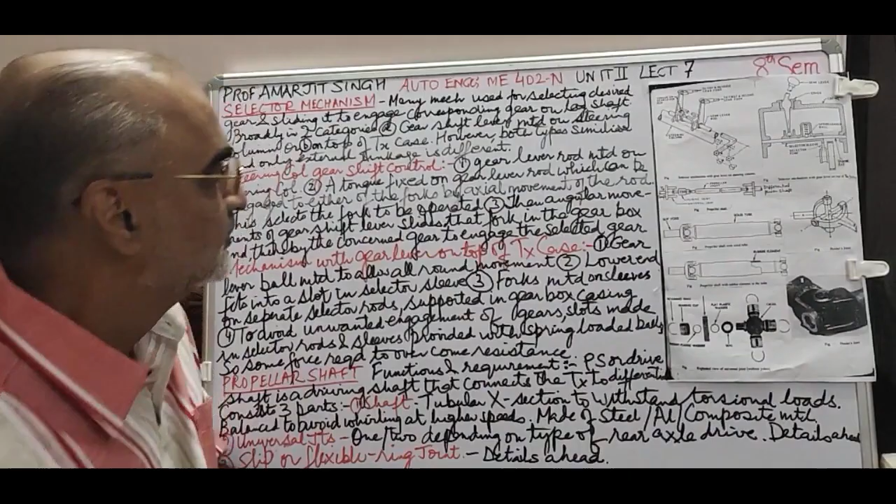Welcome to the second lecture, overall the seventh lecture, second lecture of Unit 2. Having seen the transmission box, that is the gearbox, let us see the various selector mechanisms for selecting the gear which you want for your vehicle.

There are many mechanisms used for selecting the desired gear and sliding it to engage the corresponding gear on the lay shaft. There are broadly two categories. The working is almost the same except for the positioning. The first is the gear shift lever mounted on the steering column, and secondly on top of the transmission case, that is the gearbox. However, both types are similar and only the external linkage is different.

Now let us see the parts. This is the steering column. This is the mechanism fitted. Now there are two levers. This one for the top and reverse gear fork. These are the two forks. And the second fork is for the first and second gear. This is the gear lever rod. Inside there is a tongue on the gear lever, fitted onto the gear lever rod.

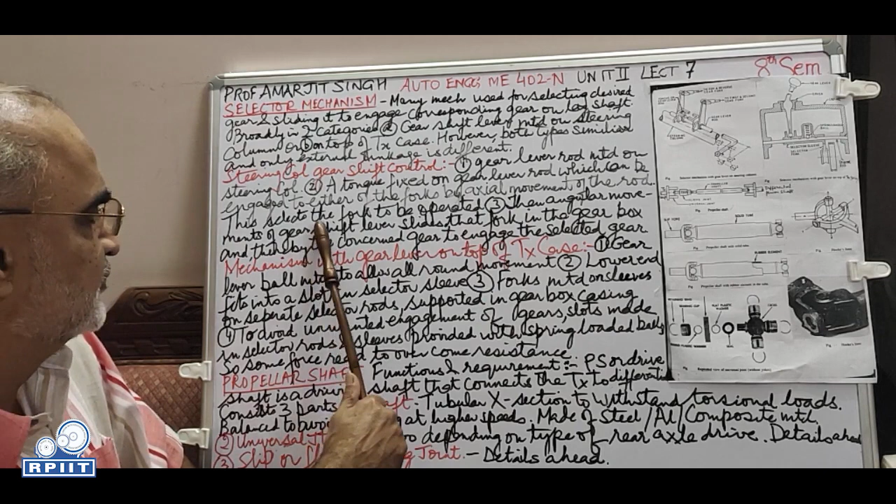The gear lever rod is mounted on the steering column, as I said. A tongue fixed on the gear lever rod can be engaged to either of the forks by axial movement of the rod. This tongue can be shifted to this fork or to this fork with the help of the lever, by the rod. This selects the fork to be operated. If you slide it this side, this fork will be selected. Slide it towards this side, this fork will be selected.

The angular movements of the gear shift lever slide that fork in the gearbox and thereby the concerned gear to engage the selected gear. Now this type, I don't know about your generation, but I have this in my car. It was in the earlier Premier Padmini and Ambassador cars. Near the steering wheel, on this side, there used to be the gear lever on the column.

So if you see these positions, this is neutral, neutral. Neutral to neutral moves the tongue from this side to this side. Now let us see first. For first, move it here and then move it upwards. As a result, this will get connected to the first gear. Again bring it to neutral for the second. Same fork. Bring it to neutral and then press it down. Second gear.

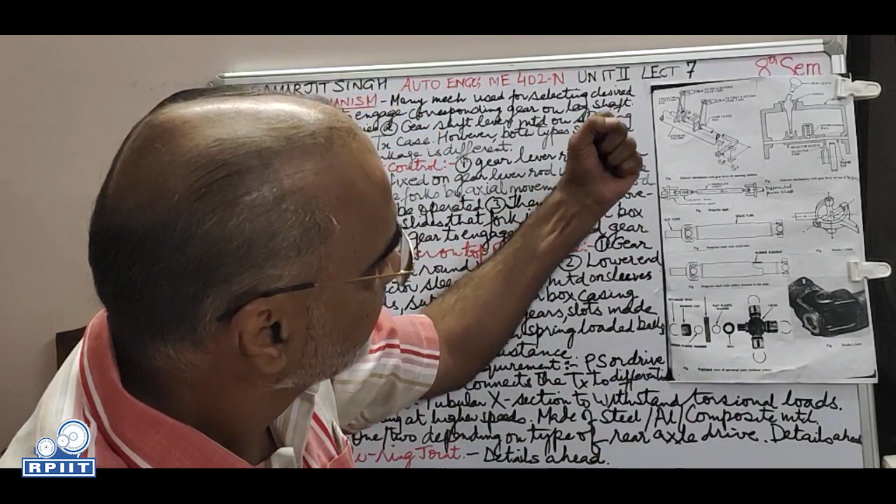For third and reverse, neutral, push it back. The tongue comes here and engages this fork. For the third, upwards, it gets connected to the third gear. And for reverse, back to neutral and downward, it connects to the reverse gear.

The second type is the mechanism with the gear lever on top of the transmission case. Let's read it, then we'll explain. The gear lever is ball mounted to allow all-round movement. Most of you must have driven a car; when you sit in neutral, you can see that there is a slight play. That is deliberately allowed, the all-round movement. This is the knob which you hold to change the gear.

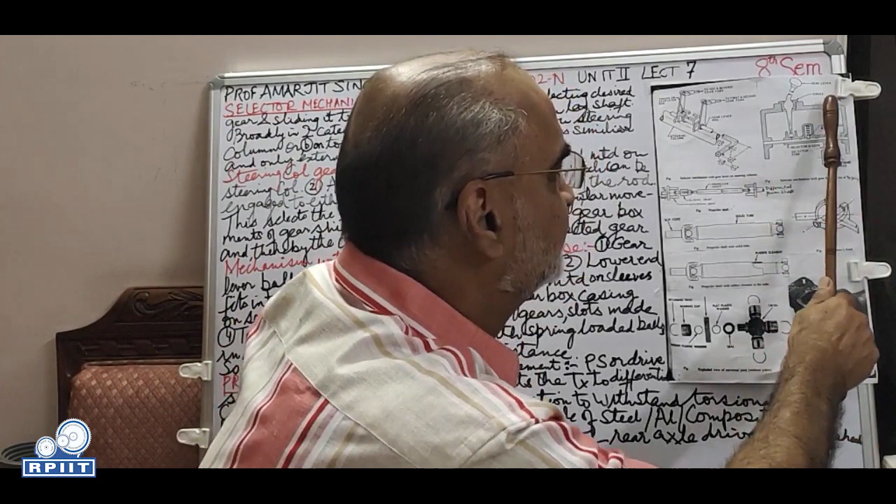This is the casing of the gearbox. This is a cover to prevent dust from coming inside. This is a rod which is mounted inside the casing. There will be a number of them depending upon the number of gears you have. This is the selector sleeve, and this is the selector fork. Selector rod. There are many selector rods inside the gearbox depending upon the number of gears.

So, the lower end fits into a slot in the selector sleeve. There's a slot here, so that it comes to the right position. There is a slot, meaning a slight depression where this ball comes and fits, and it is spring loaded. So to move it, you have to apply slight pressure.

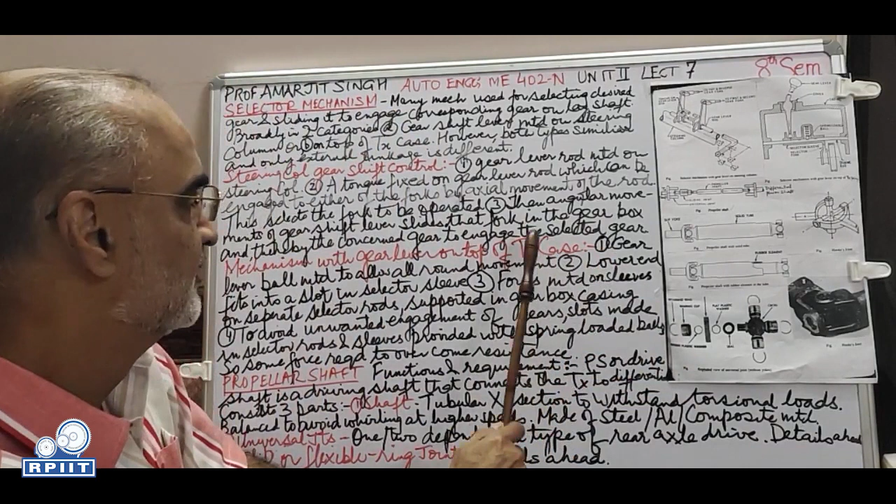Forks mounted on sleeves on separate selector rods supported in the gearbox casing. There must be bearings here. There will be bearings, and there will be a number of selector rods inside the gearbox casing. To avoid unwanted engagement of gear, slots are made in selector rods and sleeves provided with spring-loaded balls. So some force is required to overcome resistance.

So very simple. When you want to, you hold the gear knob, move it left to right, and the selector fork selects the required place and engages the gear.

The propeller shaft. This is the propeller shaft. If you have crossed a car on the GT road or any big road on your motorcycle and seen it from the side, there is a long shaft at an angle which is rotating. That is the propeller shaft, which is giving the drive from the engine to the rear differential.

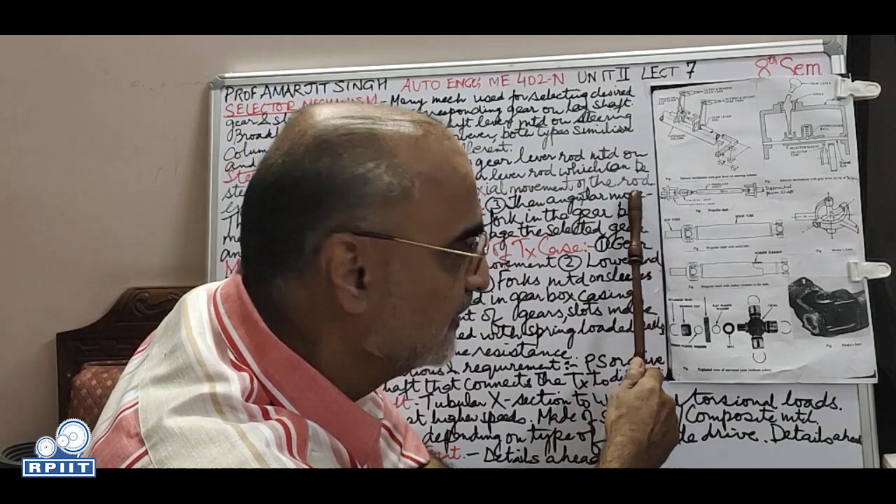This is the transmission shaft coming from the engine, propeller shaft, and then of course the flywheel and gearbox, and after the gearbox, this is the gearbox output shaft, you could say. This is connected to universal joints. I'll explain to you the function of the universal joints. This is a sliding joint, meaning the propeller shaft can move in this; it's splined from inside, for when the distance between the differential and this reduces or increases.

When will that happen? When, let's say, the vehicle goes over a speed breaker, this will rise and the distance will reduce so that this will go in. When it comes to a depression or a gadda, this will go down relatively and this length will increase. This distance will increase.

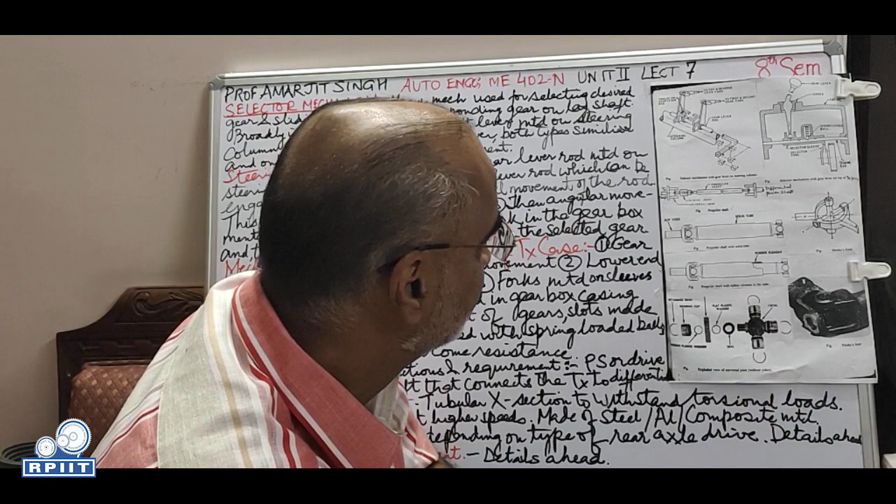The propeller shaft on one end is connected through the universal joint to the output shaft of the gearbox, and the other end again through a universal joint to the differential pinion shaft. This is the entry into the rear differential. It is called the pinion shaft. Inside, the pinion is mounted; it revolves on a big crown wheel, which is the final drive. We will be coming to that later on.

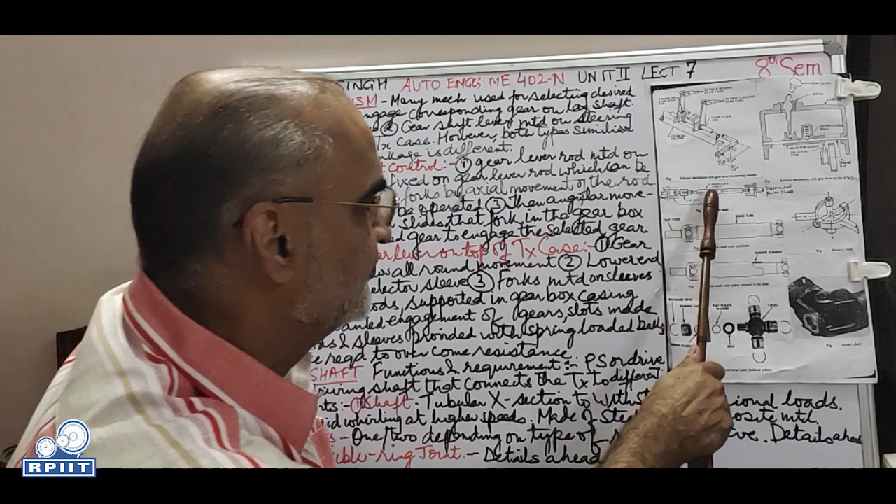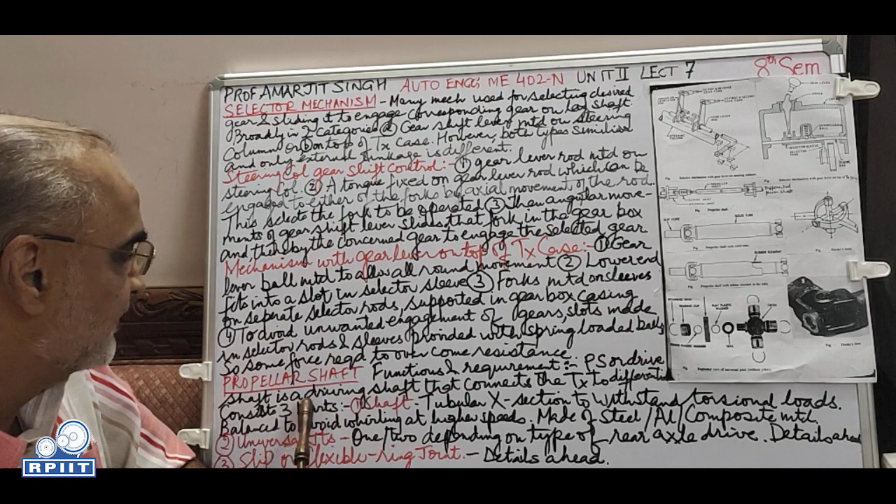What is the function of the final drive? It gives a reduction, and at this stage, it is sufficient to know these 1, 2, 3 shafts, and the propeller shaft is in between. The functions and requirements. The propeller shaft, also called the drive shaft, is a driving shaft that connects the transmission to the differential.

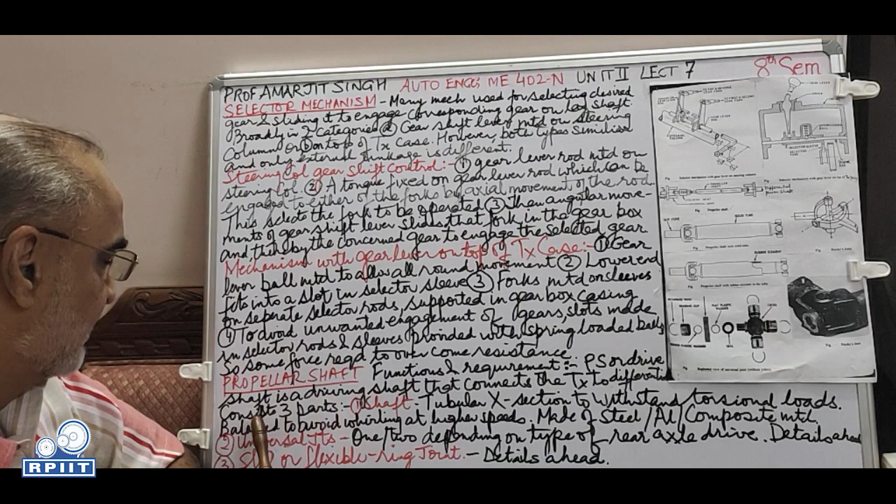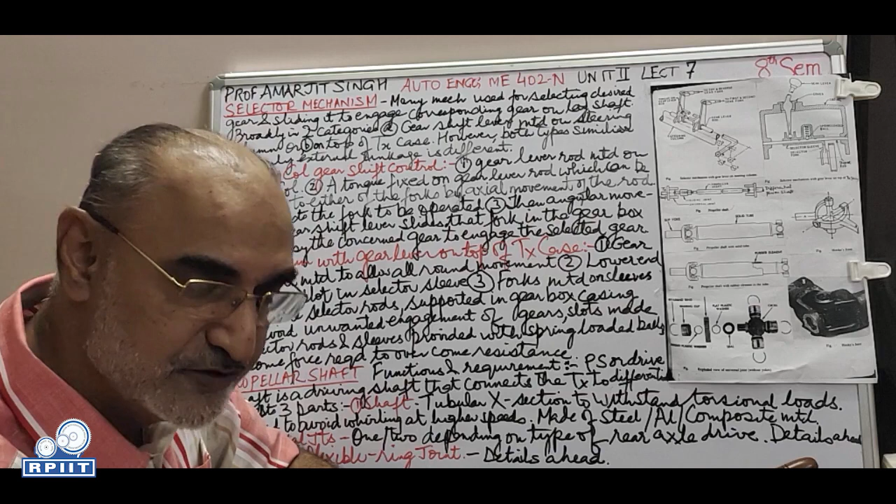It consists of 3 parts. The shaft. This is a bigger view. This is the shaft. Its cross section is generally tubular to withstand torsional loads. We know that tubular shafts can withstand torsion, because it is rotating at high speeds, low speeds, various speeds, and torsional vibrations can set in. So to offset that, we have a tubular type.

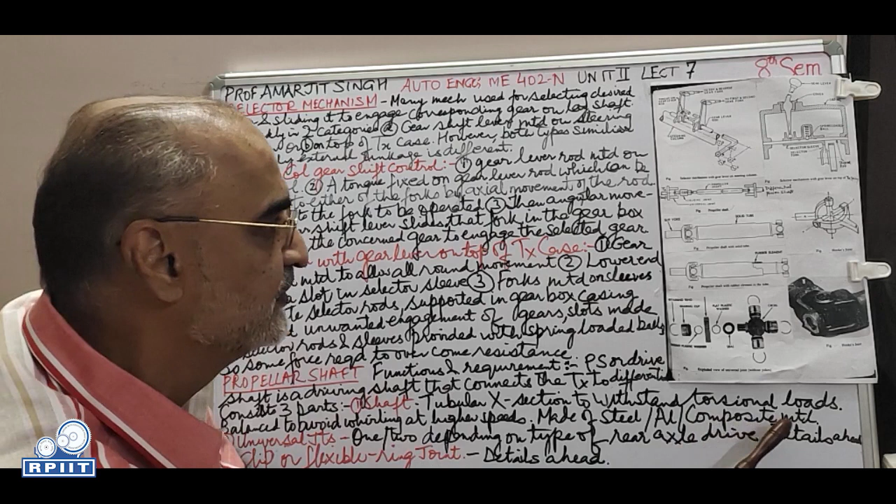It should be balanced to avoid whirling at high speeds. If it's not balanced, it will whirl. Whirl means like this, which will cause vibrations and unnecessary forces which we don't want to develop. It is made of steel, aluminium, or any composite material. Propeller shaft.

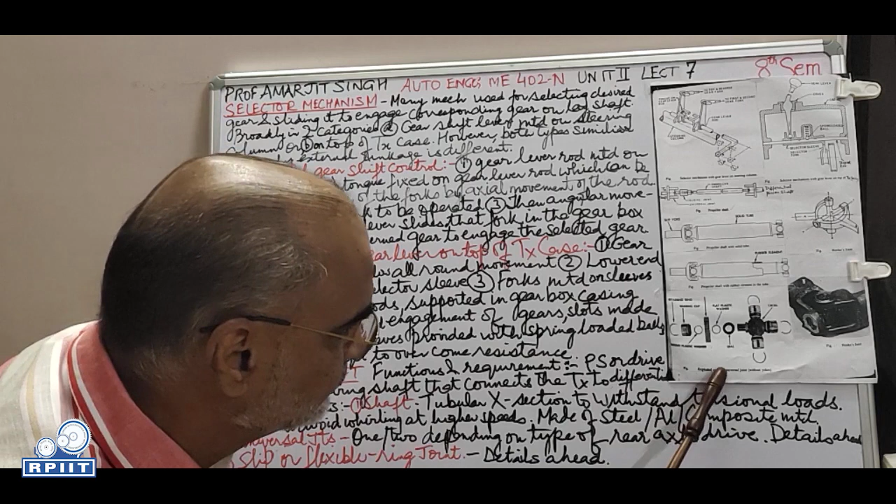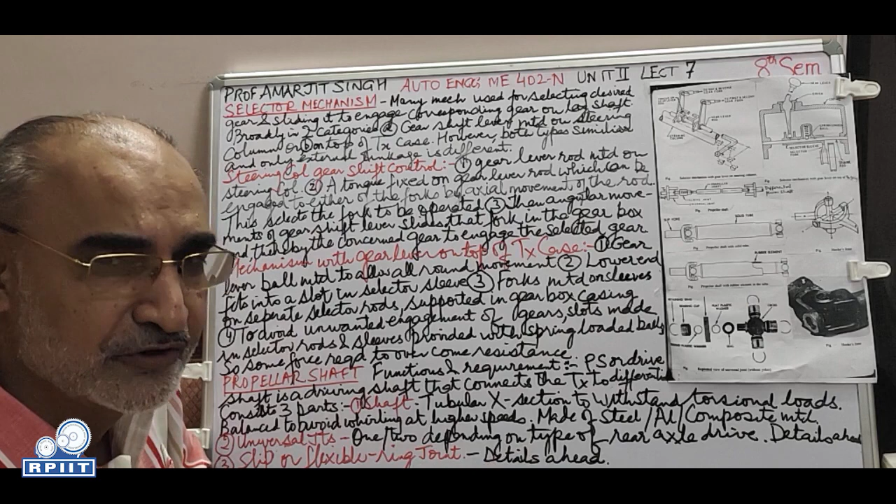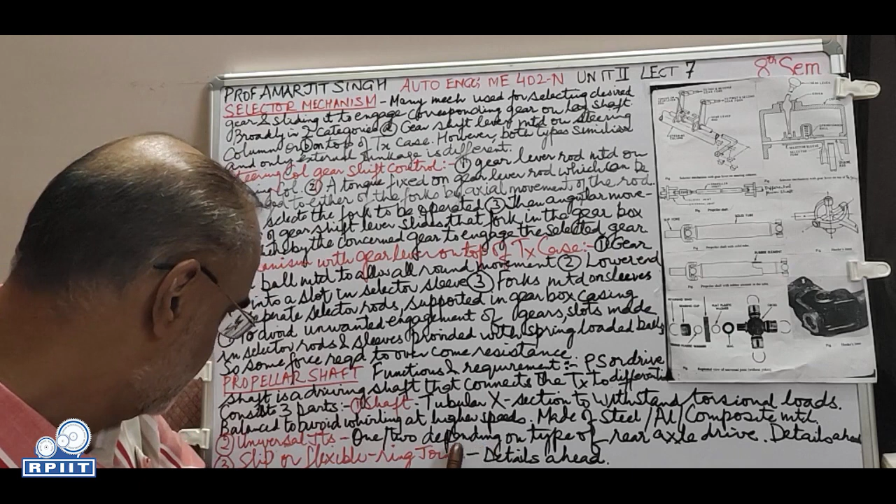Universal joints. This is the cross section of a universal joint. 1 or 2 depending on the type of rear axle drive. In differential drives, there are basically 2 types. One is the Hotchkiss drive and the other is the torque tube drive. We will be studying that ahead. In the Hotchkiss drive, there are 2 universal joints. In the torque tube drive, there is 1 universal joint.

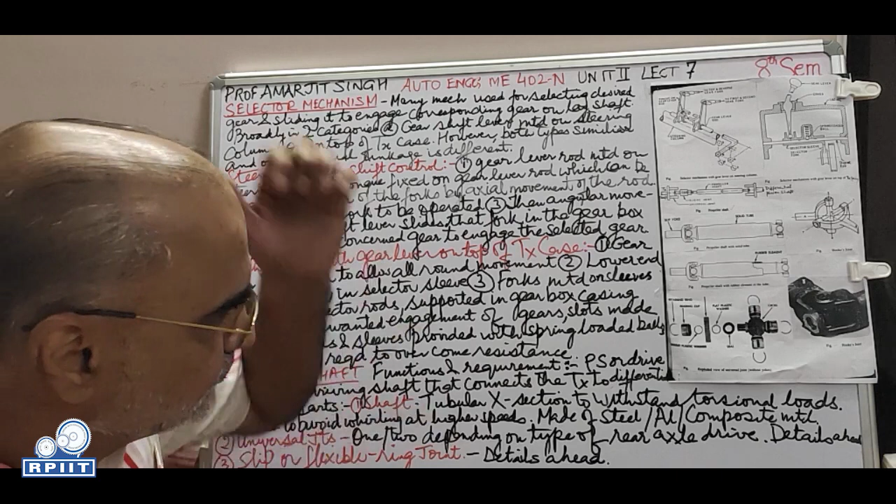So, let us see the construction. This is the cross. Bearing cups, retaining rings. This is also retaining rings. There are bearings here so that it can rotate without noise, and also to increase the life; seal, flat plastic washer. Slip or flexible ring joint. This we'll see ahead. I'll explain more of this on the next page.

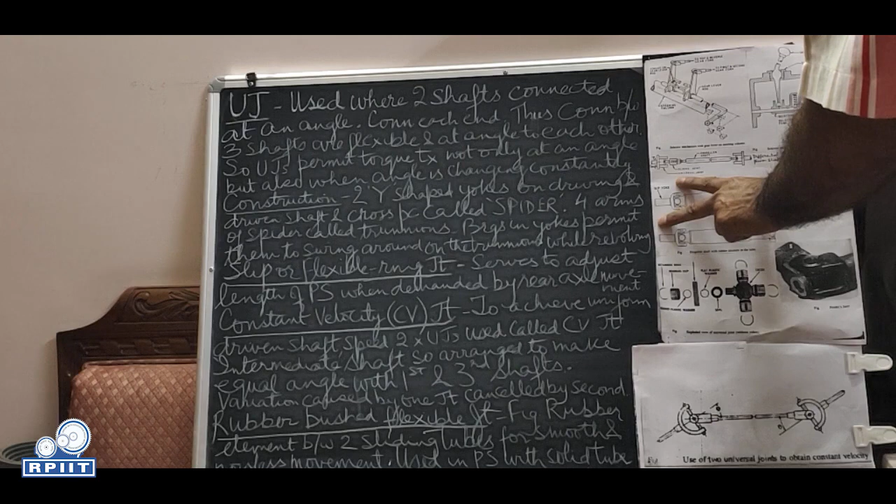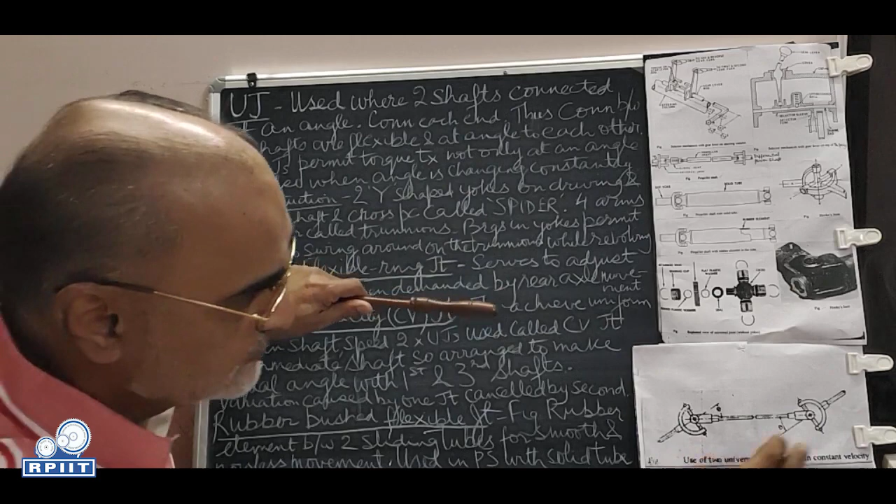So as I said, universal joint, let's read more about it. Universal joint, used where 2 shafts are connected at an angle. This is the output, let's say, shaft of the gearbox. This is the propeller shaft. They have to be connected at an angle. They are connected at an angle because the differential is at a lower level than the gearbox. This is the differential, the rear differential, that big gola which you see behind trucks. So they're at an angle.

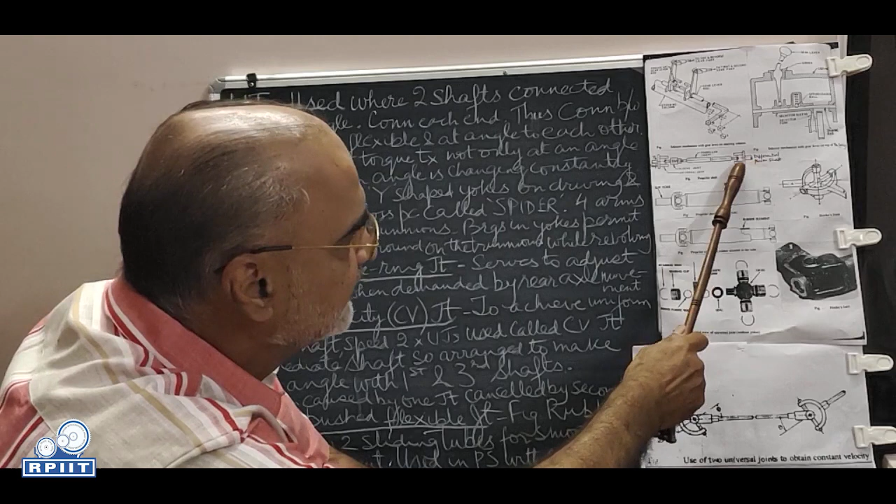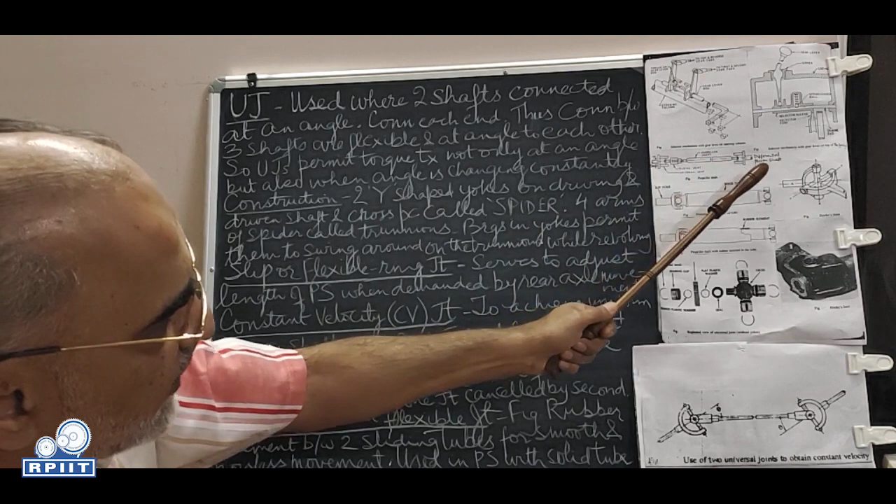Connection at each end I already explained. One side of the propeller universal joint is connected to the transmission shaft and to the propeller shaft, the other one to the propeller shaft and the differential pinion shaft. Thus, connection between the three shafts, transmission, propeller and differential pinion shaft, are flexible and at angle to each other, as I explained.

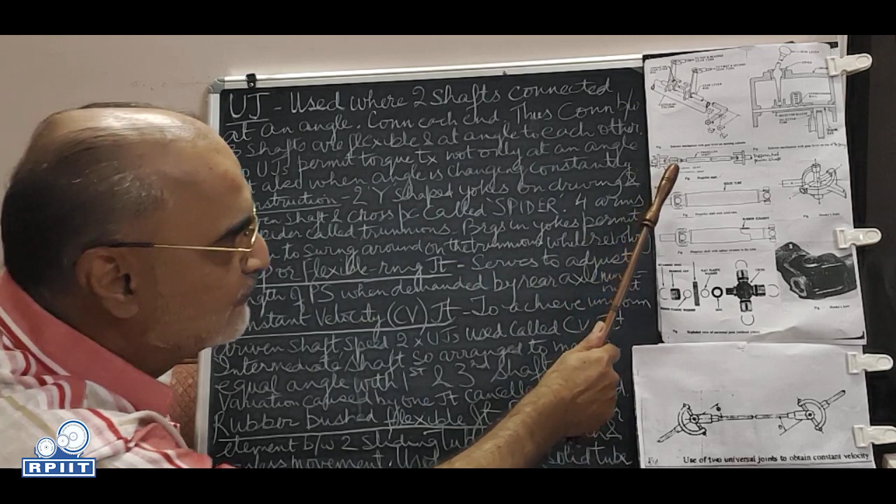So, the universal joints permit torque transmission not only at an angle, but also when the angle is changing constantly. The road is not perfectly smooth. Speed breakers, depressions, quality of road, small gaddas, big gaddas. So, the angle is changing constantly, and this helps to keep the torque even at an angle. Let's see how. When you see the construction, you'll come to know.

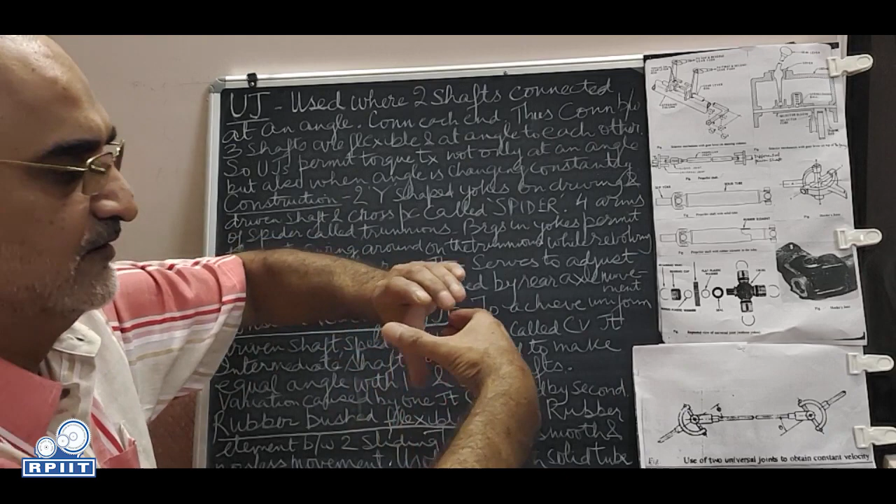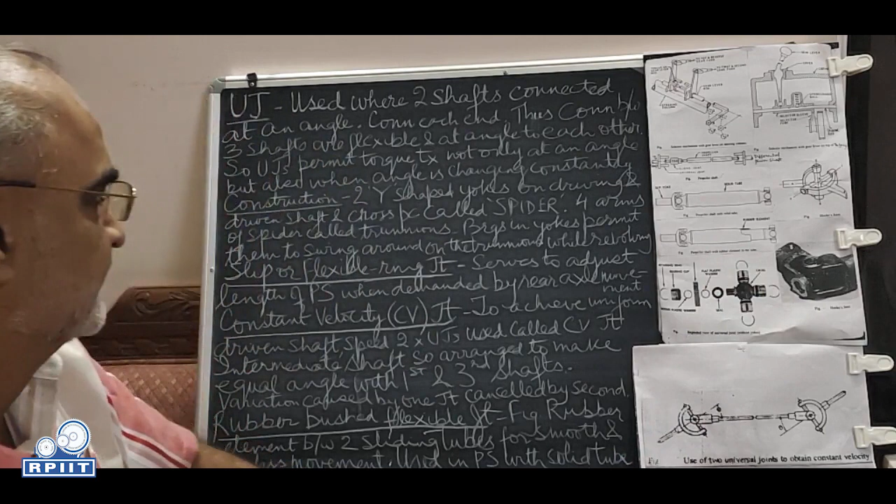Universal, there are two Y-shaped yokes. One on the driving and one on the driven shaft. This is one yoke, this is the other yoke. Let's say like this. This is one shaft with the yoke, Y-shaped yoke. This is the other shaft, other Y-shaped yoke. In between this, there is this thing called spider. 4 arms of the spider, 2, 3, 4. 4 arms of the spiders are called trunnions. These are trunnions.

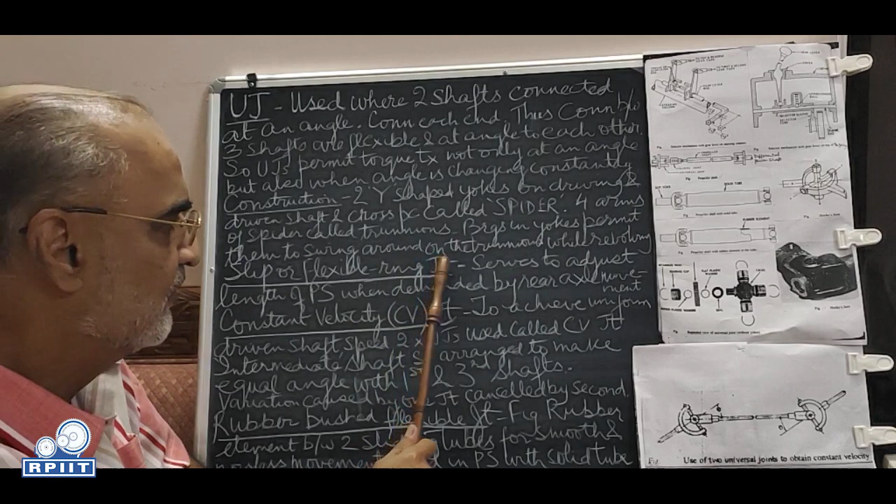Bearings in the yokes, which I mentioned earlier also, permit them to swing around on the trunnions while revolving. Propeller shaft is really fast, and it allows it.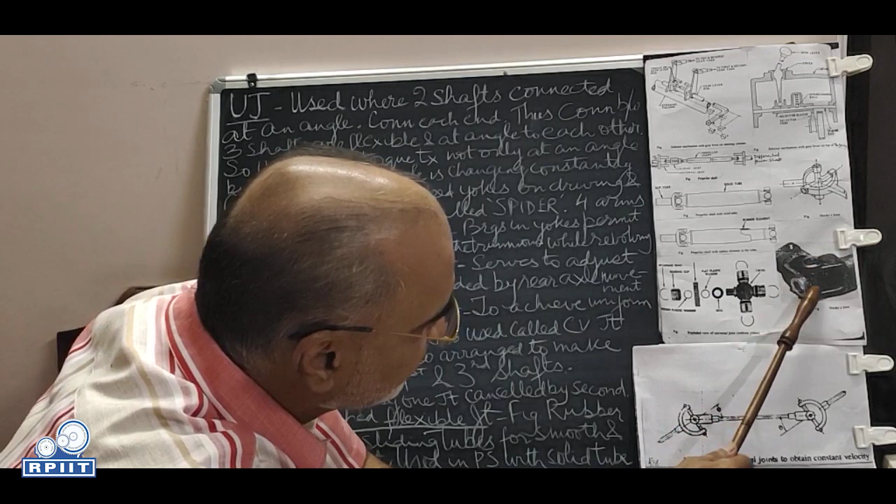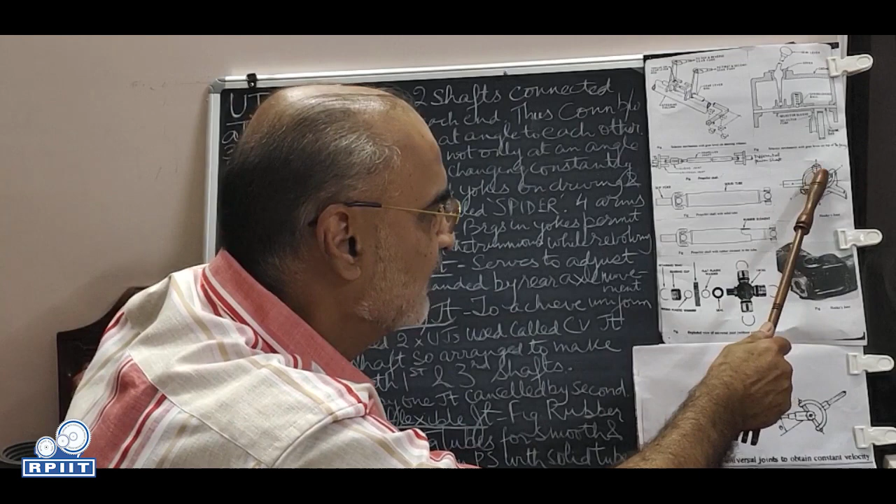Here's another type, Hooke's joint. This is a cross piece in between. The name is given after who invented it. This is the Hooke's joint. It's basically the same thing, different in construction. This is the Y which I mentioned, and this is the other Y. This is the driving shaft, this is the driven shaft, and this is the spider. Trunnions, 1, 2, 3, 4 trunnions, and bearings.

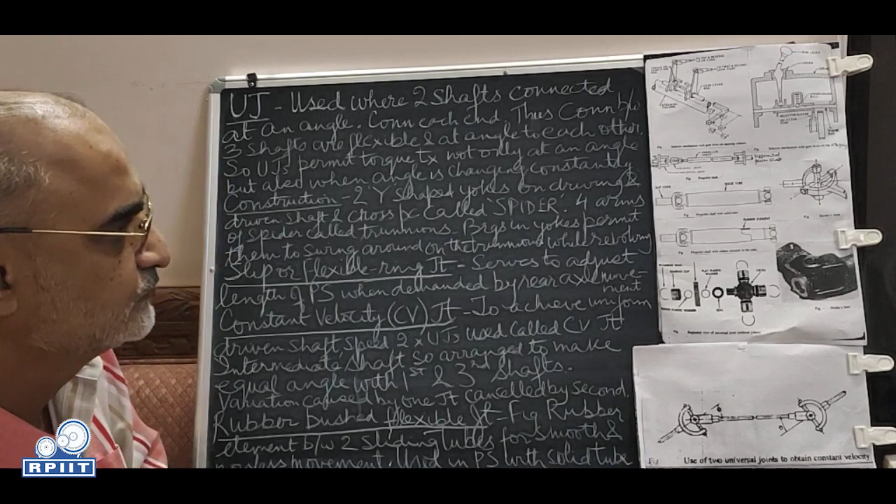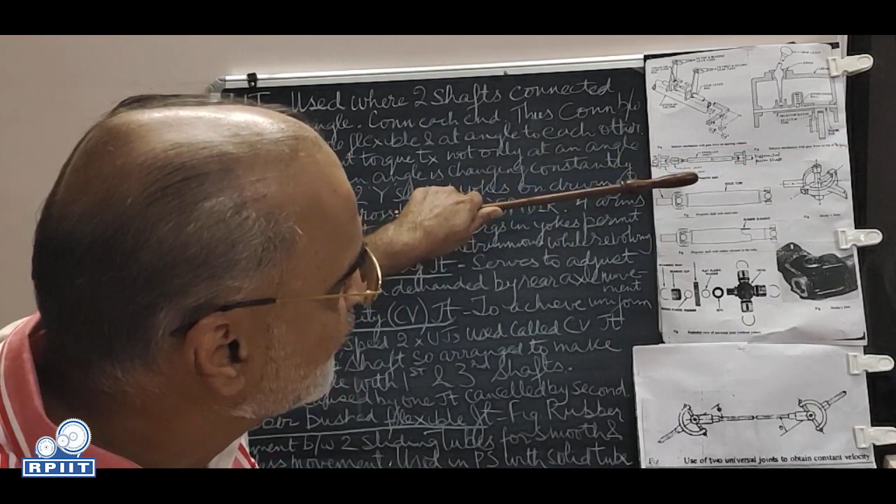Slip or flexible ring joint. This serves to adjust the length of propeller shaft when demanded by the rear axle movement. Sliding joint, as I mentioned earlier, the drive is like this. Sometimes the rear wheels will go over a speed breaker, go up, and this will move in. So that allowance for axial movement has to be provided on the propeller shaft.

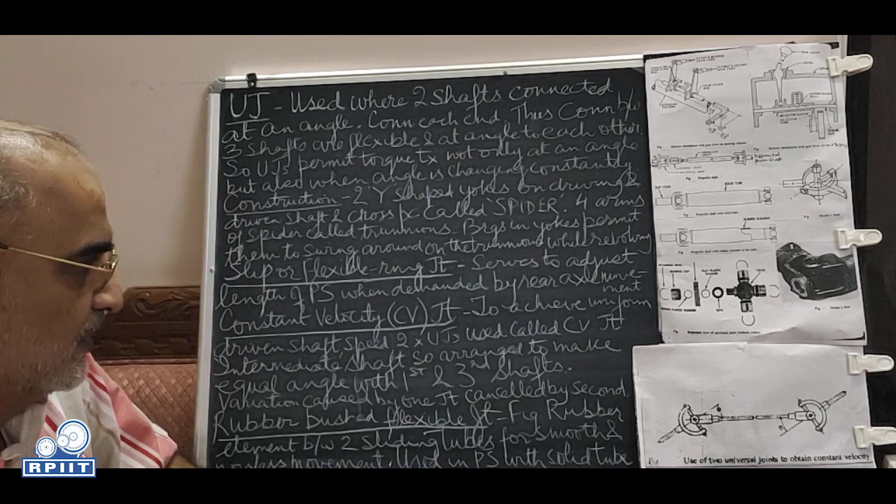Constant velocity joint. Constant velocity joint is nothing but 2 universal joints. Let's see. Use of 2 universal joints to obtain constant velocity. There are 3 shafts. This is one with the yoke. This is the universal joint. This is the second universal joint. So, this angle is the same. This is being done by these universal joints.

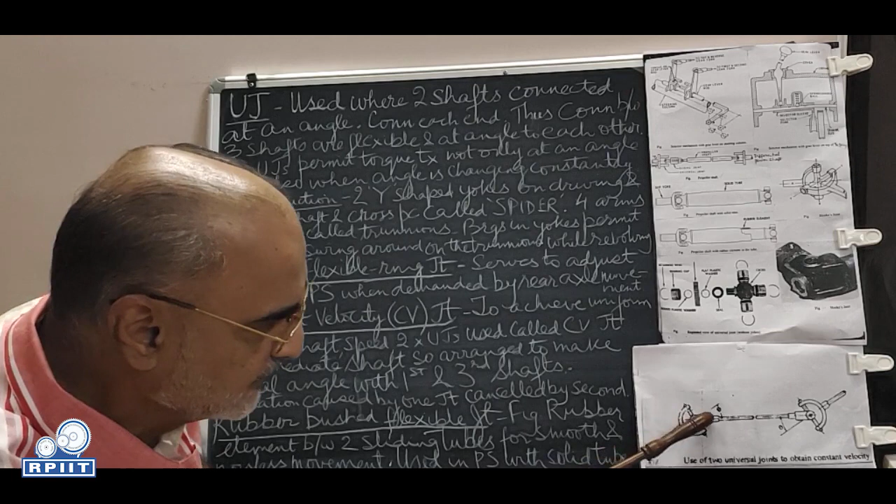So, the transmission shaft, that is the gear shaft, is this. Let's say this is the propeller shaft, and this is the shaft going into the differential. This angle is the same, theta. If this is rotating at a certain speed, this will also rotate at the same speed and also at the same angle.

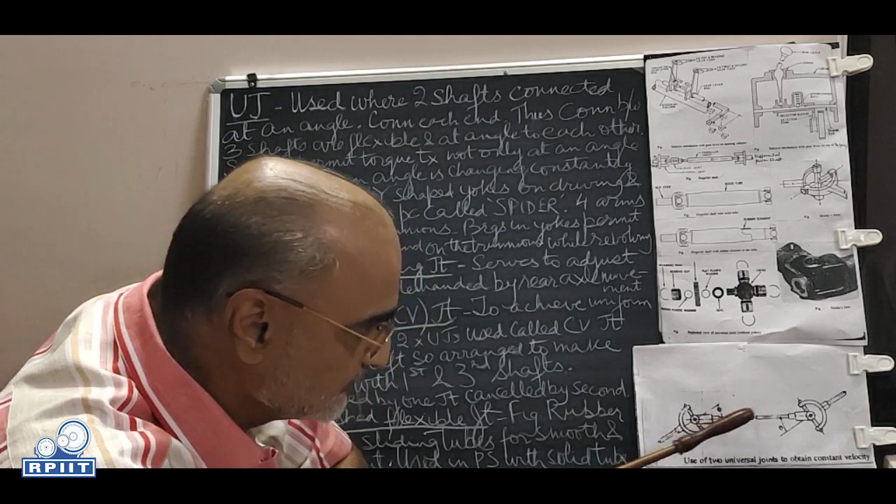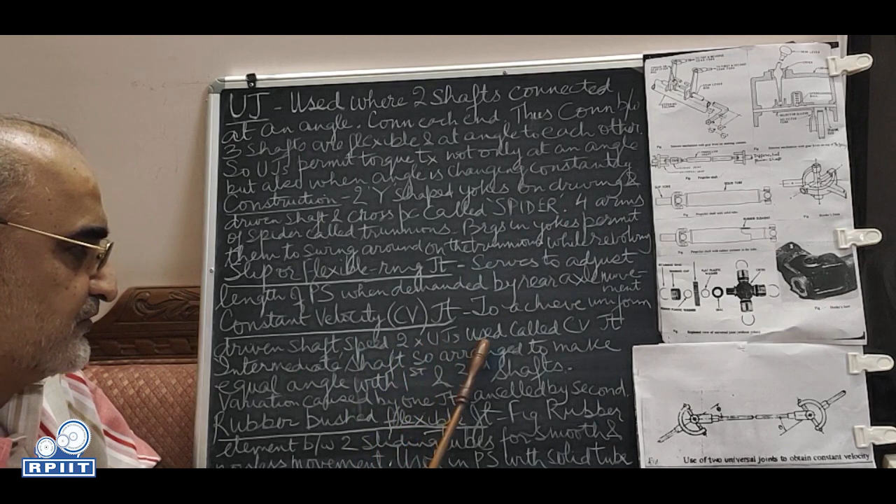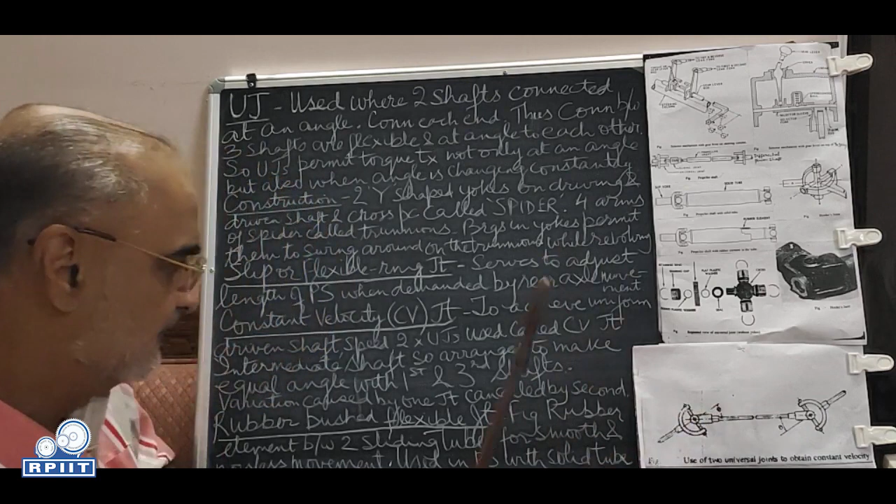To achieve uniform driven shaft speed, 2 universal joints are used. This is called constant velocity joint. It's providing constant velocity. The intermediate shaft is so arranged to make equal angle with first and third shaft. The same angle has to be made with first and third shaft. The variation caused by one is cancelled by the other, naturally.

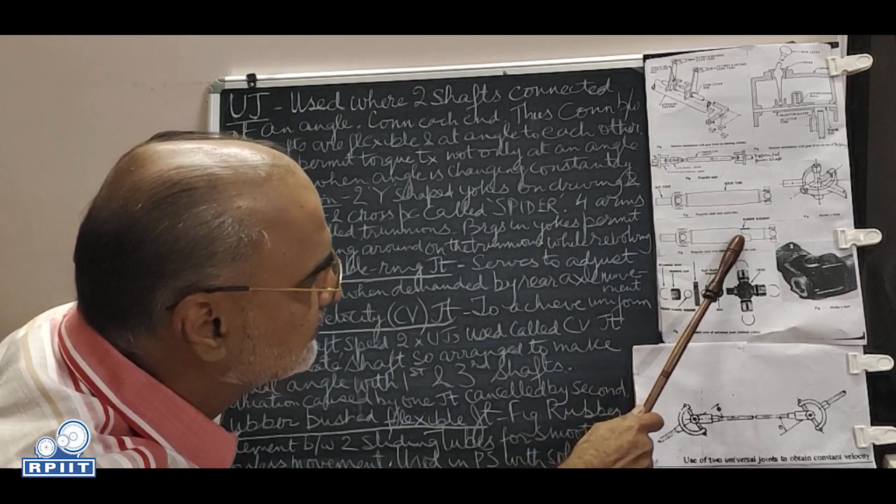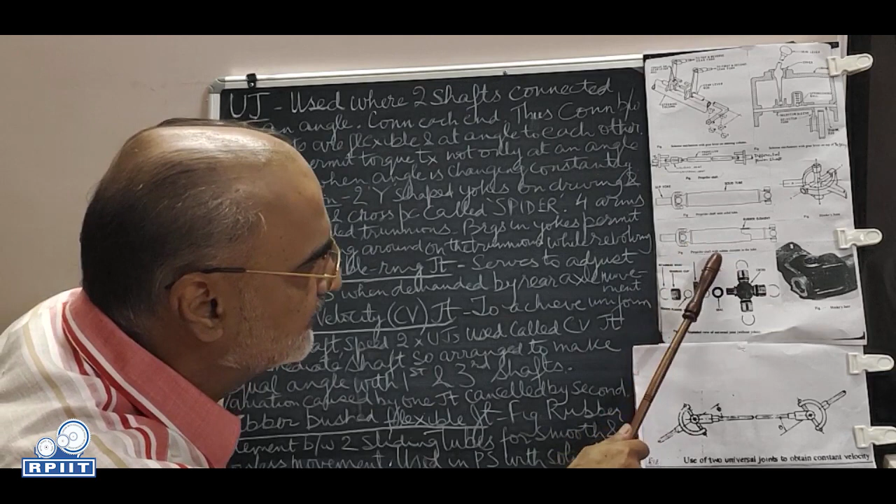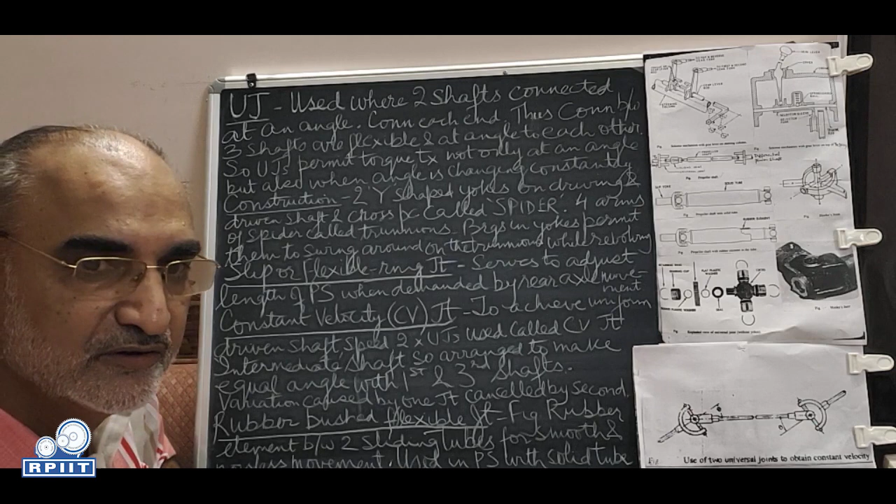Then we come to the rubber bushed flexible joint. Rubber element between two sliding tubes. Let's say this is a propeller shaft with rubber elements inside. There are two concentric tubes with a rubber element inside. I think you must have guessed for what reason. For smooth and noiseless movement, so that there is no clanking and unnecessary big sounds, and friction is avoided.

This is doing the same job as this. Used in the propeller shaft with solid tube.